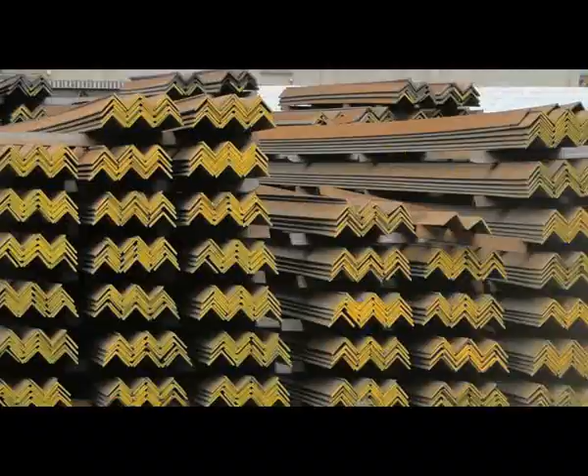Vishal Engineers and Galvanizers was established in the year 2004 by promoters having a collective experience of over 45 years in the steel industry and have a very well-known name in the market for manufacturing and trading of reinforcement steel and structures. It is with this knowledge and rich experience of steel industry that the promoters entered into the fabrication

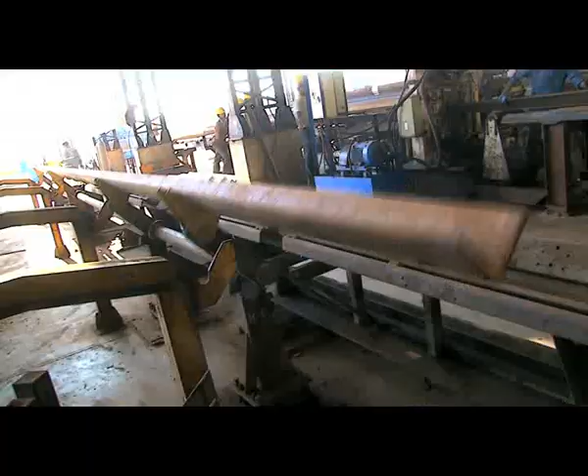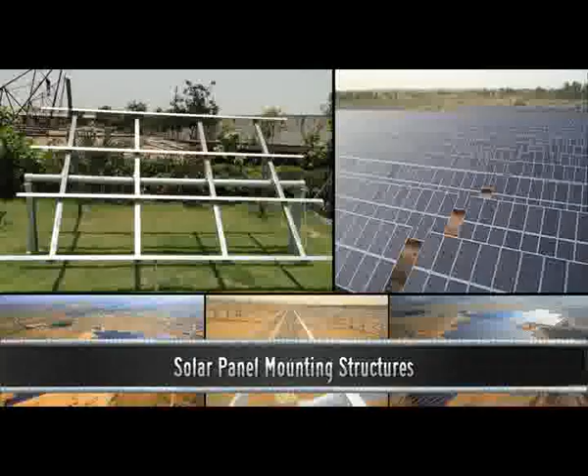and galvanizing industry. The company has established a firm footing in the industry by getting substantial orders of power transmission line towers, telecom towers, windmill towers, solar panel mounting structures, substation structures, heavy fabrication and Galva rebars, etc. from major companies and engineering groups.

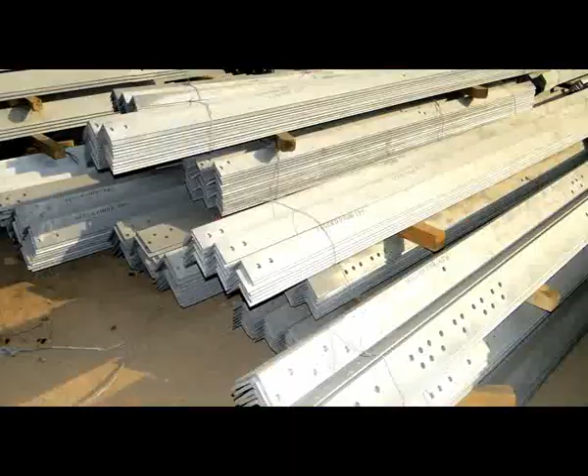These orders were awarded by reputed organizations to Vishal due to its strict quality standards and timely delivery, resulting in positive market reference. The company has been awarded the ISO 9001:2008 certification from its inception. It is also an approved vendor for PGCIL, GETCO, MSETCL, RVPNL, MPTCL, BSNL and many more reputed corporates.

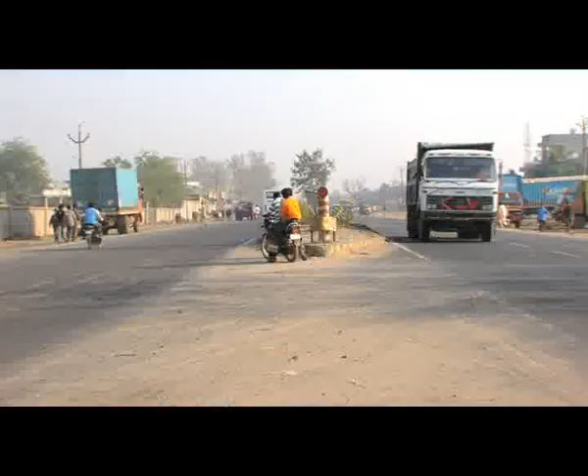In April 2011, the promoters of Vishal converted it into a private limited company, now known as Vishal Engineers and Galvanizers Private Limited. The manufacturing unit is located in a prime industrial area situated on National Highway 8A, just 20 kilometers from Ahmedabad. The location offers very easy transport connectivity. The land area of Vishal is 45,000 square yards.

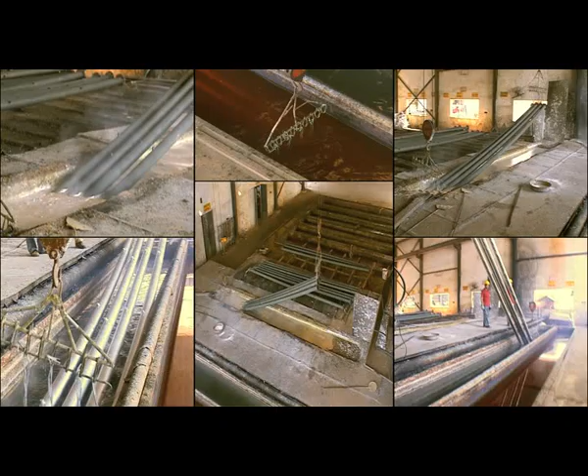The company has state-of-the-art galvanizing plants and fabrication shops, well equipped with modern technologies. There are two separate administrative blocks of 4,500 square feet each with fully equipped training room to keep the staff updated on latest developments in the sector. The company also assures and enhances the strength of its workforce of 450 by providing accommodation facilities like 12 staff quarters and 60 labor quarters.

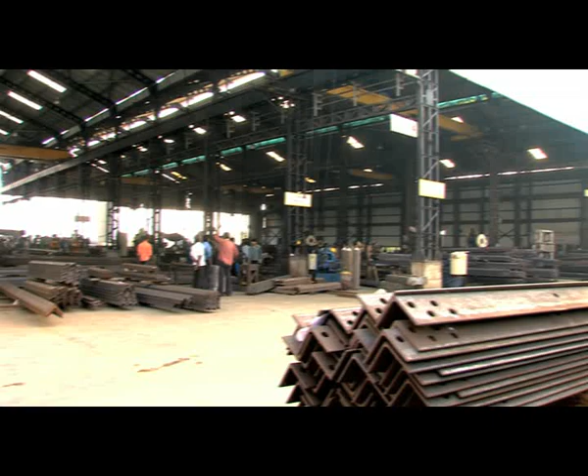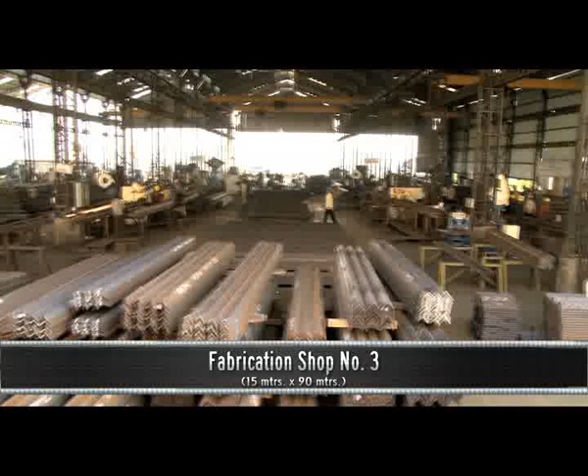Fabrication plants. The company has state-of-the-art fabrication plants, well equipped with modern fabrication technologies. The shed area of fabrication plants is Fabrication Shop 1, Fabrication Shop 2, Fabrication Shop 3, Fabrication Shop 4, each measuring 15 meters by 90 meters.

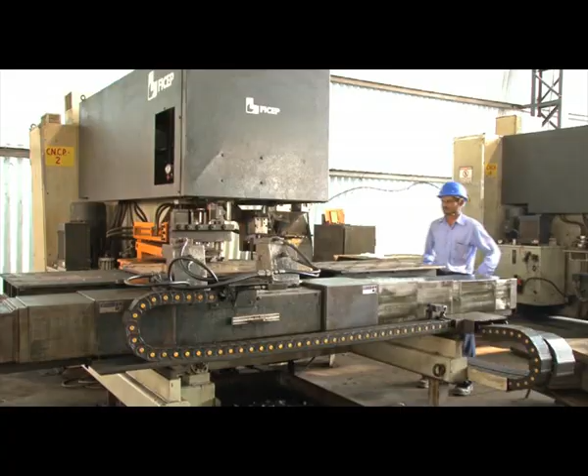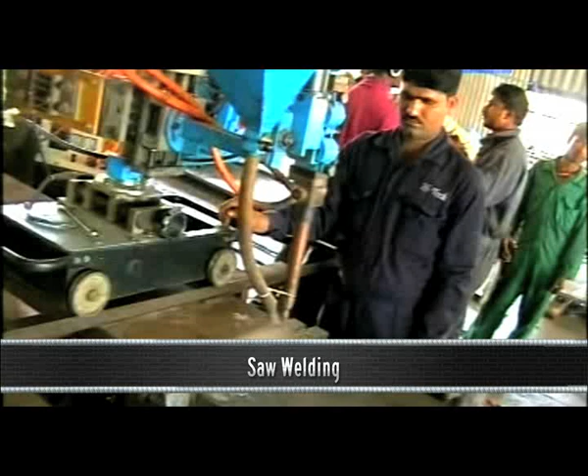The fabrication shop comprises CNC machines, imported hydraulic machines and special purpose machines to perform operations such as straightening of sections, section cutting, item numbering, CNC section punching, CNC plate punching, bandsaw cutting, heavy drilling, SAW welding, MIG welding, hot bending, heavy engineering, etc.

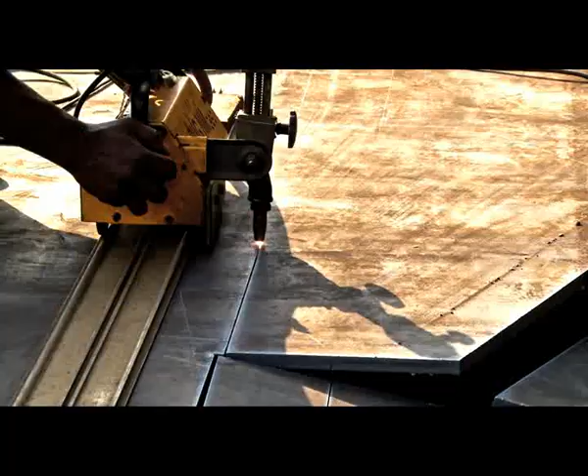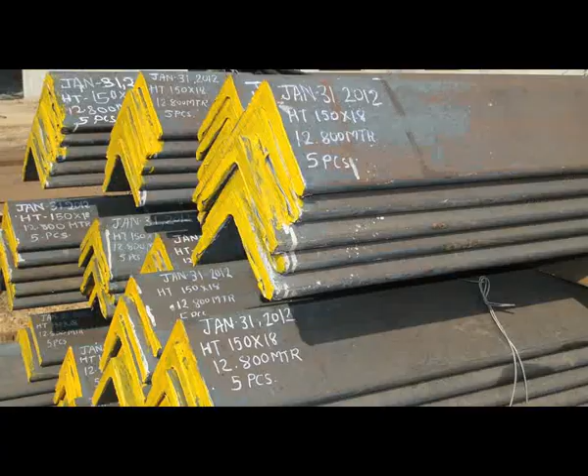The fabrication is undertaken as per IS 802 Part 2 international standards and also to the specific requirements of our clients. The company has a robust quality control program in place, right from raw material inspection, material usage traceability to final inspection. 100% black inspection is carried out for all products, thus leaving no room for doubt in quality.

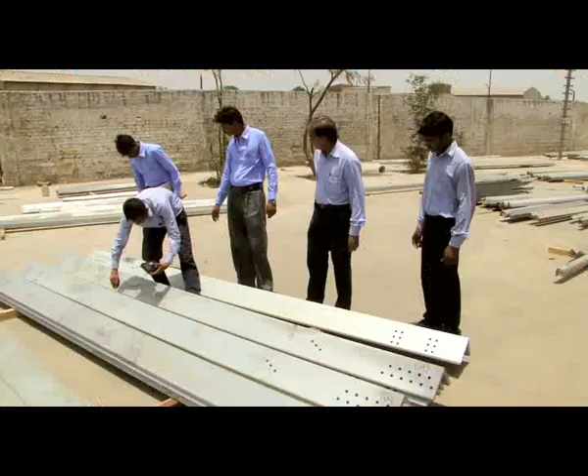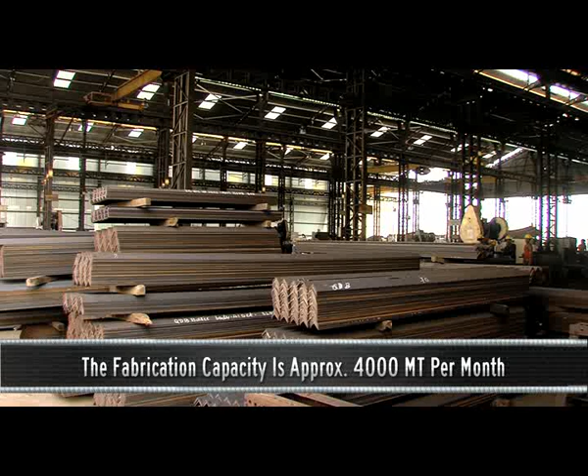The company also assures the consistency of its product by doing complete proto-assembly of structure, which is type tested at government-approved test beds like CPRI Bangalore. With the above facilities, the fabrication capacity is approximately 4,000 metric tons per month.

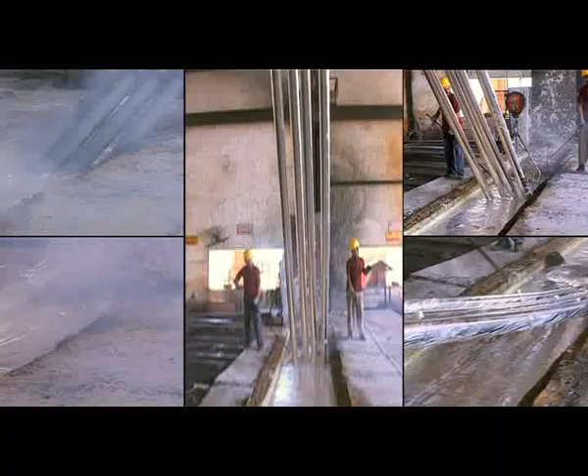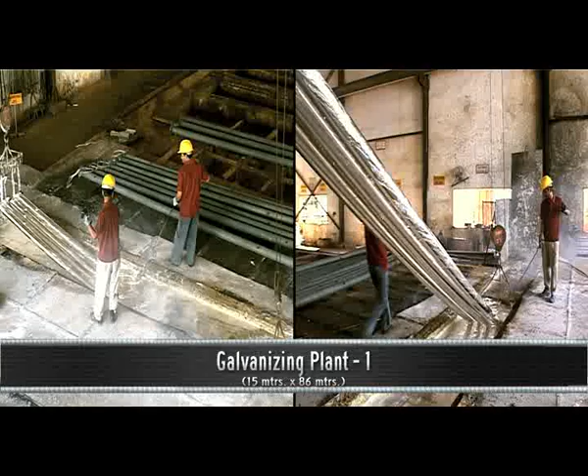Hot dip galvanizing. Hot dip galvanizing process is carried out in a fully automated temperature-controlled gas-fired galvanizing bath. The company owns two galvanizing plants. Galvanizing Plant 1, 15 meters by 86 meters. Galvanizing Plant 2, 21 meters by 66 meters.

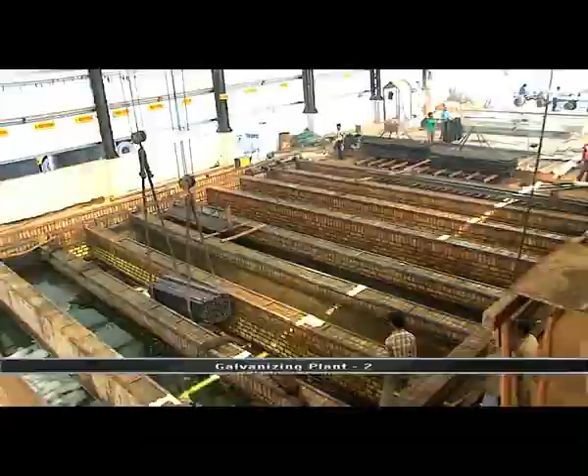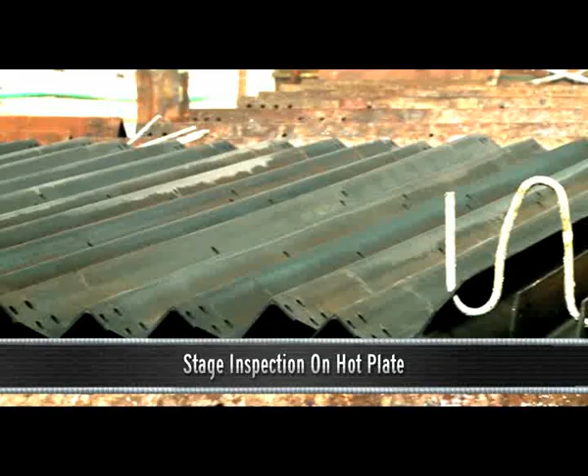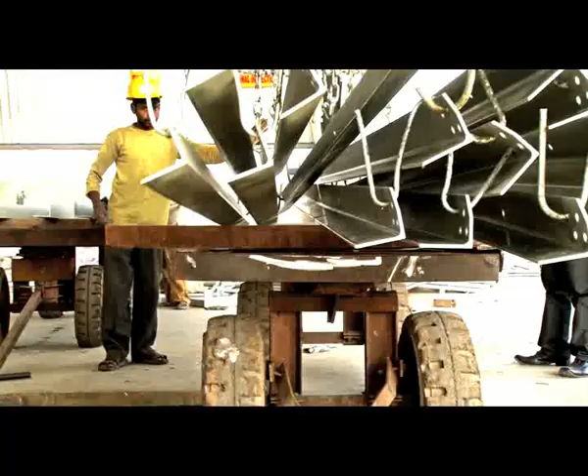The processes carried out in these plants are degreasing, acid pickling, rinsing, fluxing, stage inspection on hot plate, hot dip galvanizing, quenching, passivation, blast cleaning. The work carried out at each stage is as per the inspection matrix in accordance with the relevant standards and a well-established quality plan.

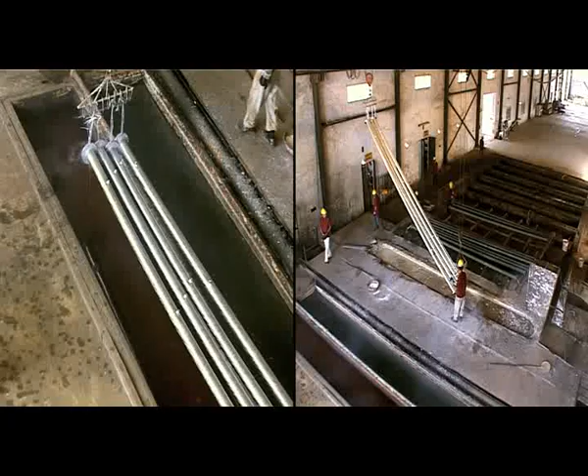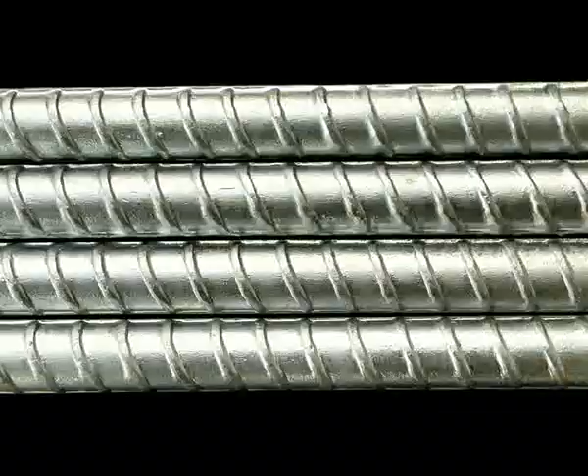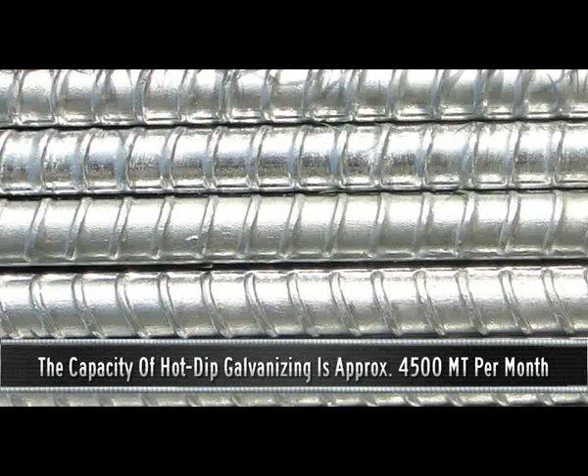The galvanizing is being carried out as per IS 4759 and 2629 on structure, as per IS 12594 on reinforcement bars, that is Galva rebars, and also as per the international standards. After galvanizing, zinc coating thickness is measured with magnetic gauge and eddy current method by dial-type meter and digital elcometers to ensure the best galvanizing results. With the above facilities, the production capacity of hot-dip galvanizing is approximately 4,500 metric tons per month.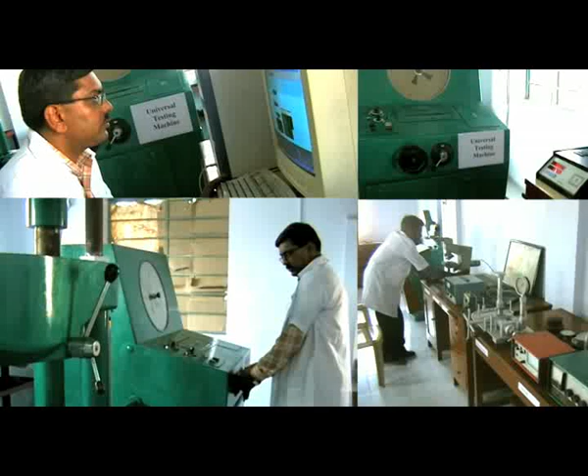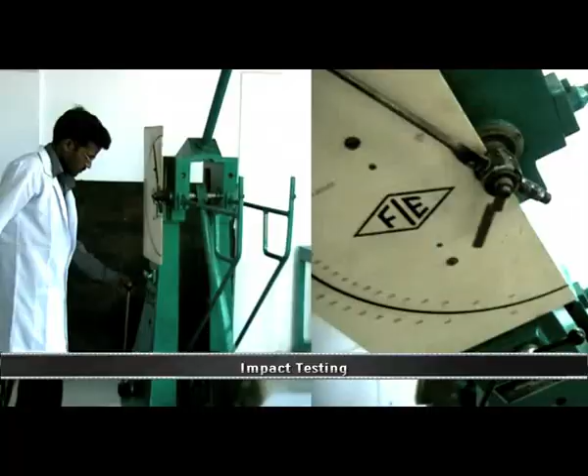Supply of high-end quality product and complete customer satisfaction is the ultimate motive of Vishal, and to ensure the same, it has complete in-house facilities of testing like spectroanalysis, tensile testing, impact testing, and galvanizing tests like hammer testing, peeling testing, mass of zinc test, etc. carried out with the help of test pieces attached to the product.

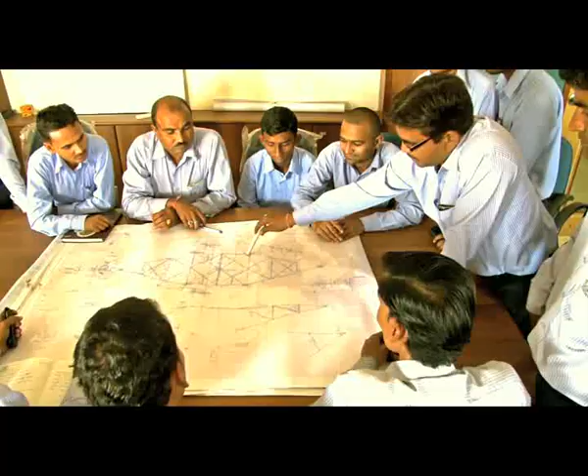The company can take pride in achieving quite a few milestones thanks to the continued improvement in production methods, automation, etc. advocated by the management. The care taken at every stage by qualified technical staff also goes a long way in establishing credibility by delivering quality and cost-effective products to the clients. Galvanized TMT rebars.

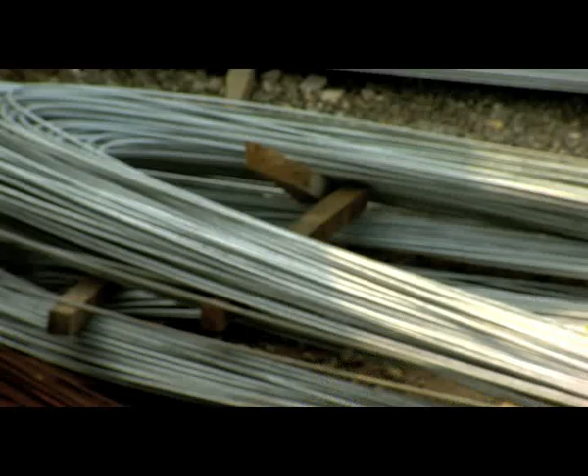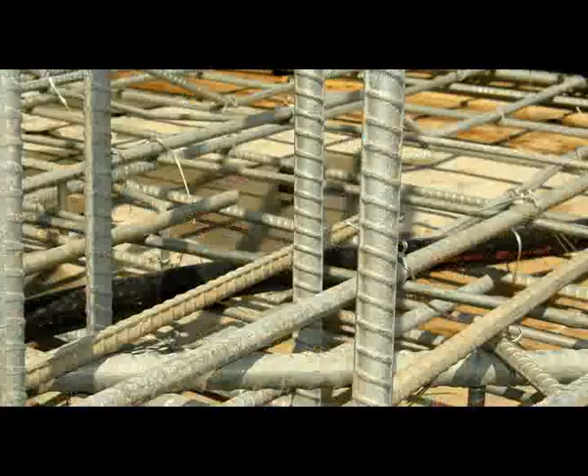Vishal Engineers and Galvanizers Private Limited is the first company in India to introduce hot-dip galvanized reinforcement steel bars, that is Galva rebars, as a readily available standard product. The company also undertakes job work of hot-dip galvanizing of MS reinforcement and TMT bars. The rebars are galvanized according to Indian Standard 12594 1988.

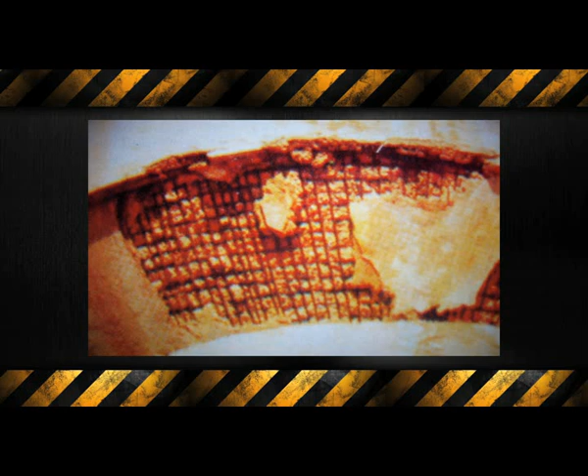It would be worthwhile to mention that the reason behind collapse of buildings is not earthquake, but expansion of steel due to corrosion by up to 3 times its original diameter. This leads to cracks in the surrounding concrete, resulting in weakening of structure.

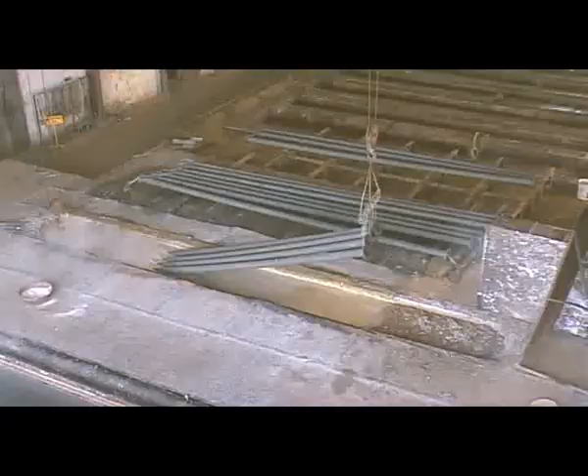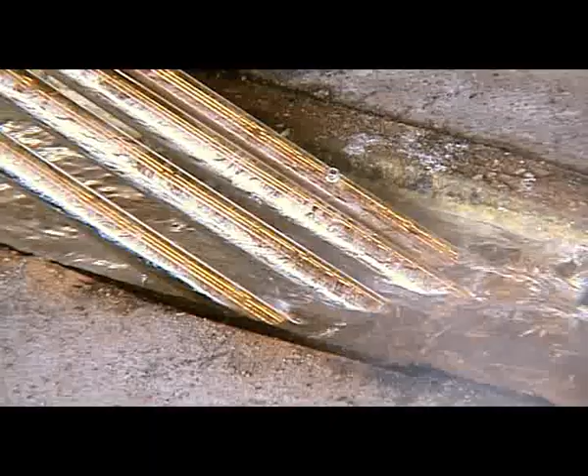The hot-dip galvanizing is a corrosion protection process which results in metallurgical bonding by completely enclosing the steel and sealing it from the corrosion impact of the atmosphere without any effect to the properties of steel. This process is secure and reliable and has emerged technically superior and cost-effective in the long run. It increases life of the TMT bars, that is Galva rebars, by more than 300%.

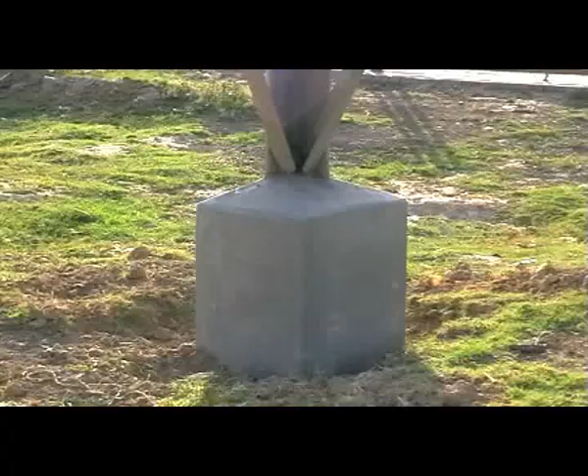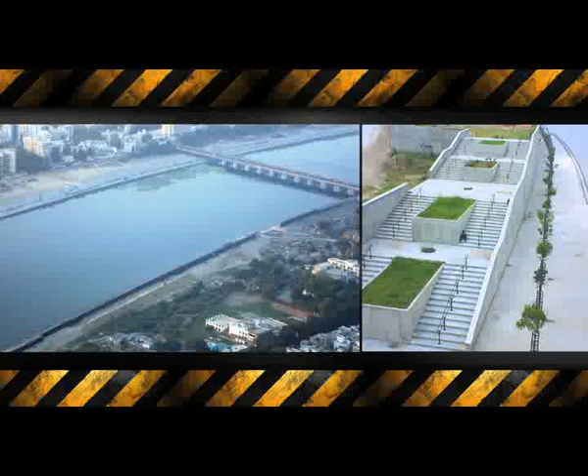We all observe common galvanized structures like windmill towers, power transmission towers, and telecom towers, etc., which were erected in the open atmosphere 30 to 60 years ago. They still have some of their original coating and are expected to be corrosion-free for years to come. Many great infrastructures in the world have used galvanized steel, like the Changi Airport of Singapore, Lotus Temple, New Delhi, Sabarmati Riverfront, Ahmedabad. Advantages of hot-dip galvanizing over epoxy and painted TMT bars.

The galvanizing coating is even and formed through a metallurgical reaction, whereas in epoxy-coated and painted surfaces the process creates a superficial layer not organically bonded to the steel. Galvanizing coating is stronger like steel and thicker than any other coatings on the corners and edges, while epoxy-coated and painted surfaces are weak as they thin out in these areas.

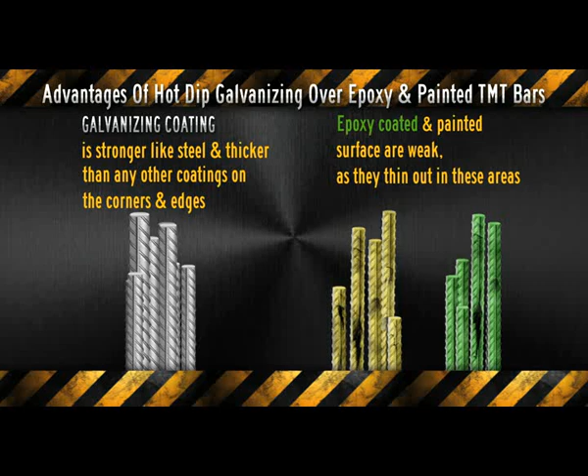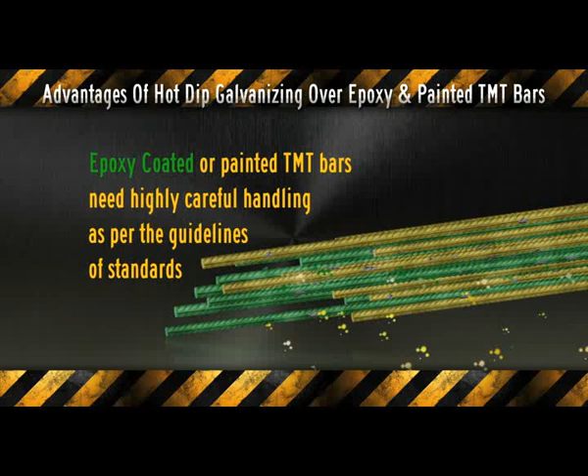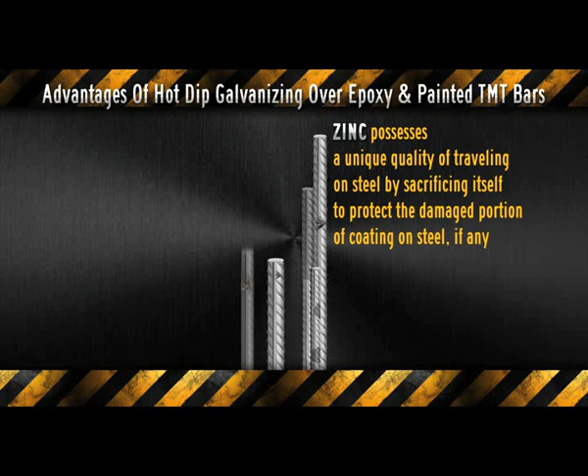Galvanized TMT bars can sustain heavy wear, impact and abrasion resistance during transportation, handling and site operation, while the epoxy-coated or painted TMT bars need highly careful handling as per the guidelines of standards. Zinc possesses a unique quality of traveling on steel by sacrificing itself to protect the damaged portion of coating on steel, if any. Zinc provides barrier and cathodic protection against corrosion, while epoxy-coated or painted TMT cannot stop corrosion once damaged.

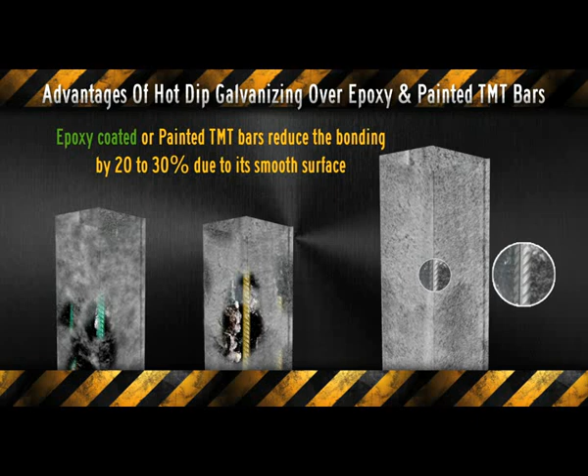Galvanized TMT bars can be stored for years in open environment, while the epoxy-coated or painted TMT bars need to be stored covered or away from sunlight as they are highly affected by UV rays of sun. The concrete bonding of galvanized TMT bars is same or better than normal black bars, while the epoxy-coated or painted TMT bars reduce the bonding by 20 to 30% due to their smooth surface, leading to use of more TMT bars than normal black or galvanized TMT bars.

Let's understand the life cycle cost by using three types of coated TMT in the same environment. At the average cost in rupees per metric ton of steel, the approximate initial cost of hot dip galvanizing is rupees 13,000, while for fusion bonded epoxy coating is rupees 12,000, and for painting it is rupees 9,000. After 5 years, the galvanizing does not require any maintenance. The epoxy coating may also not require maintenance only if the coating is not damaged before or while concreting. However, the painting needs to be done again at a cost of rupees 9,000.

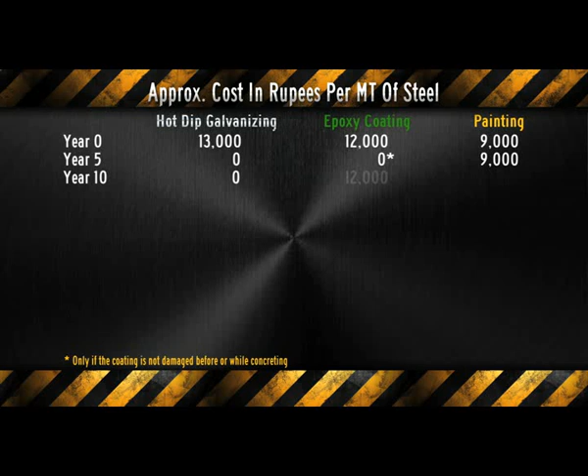After 10 years, galvanizing needs no maintenance. The epoxy coating is to be done again at a cost of rupees 12,000 and repainting at a cost of 9,000. If we calculate life cycle of 50 years, the cost of galvanizing is rupees 13,000 only, while for epoxy coating it is rupees 60,000, which is about 4.5 times, and for painting it is rupees 90,000, which is about 7 times. For simplicity, we have not calculated inflation and other hidden costs like replacing interior appearance, addition of steel, etc. The maintenance cost of fusion bonded epoxy coating and painting is much more in the long run, while galvanizing is virtually maintenance-free.

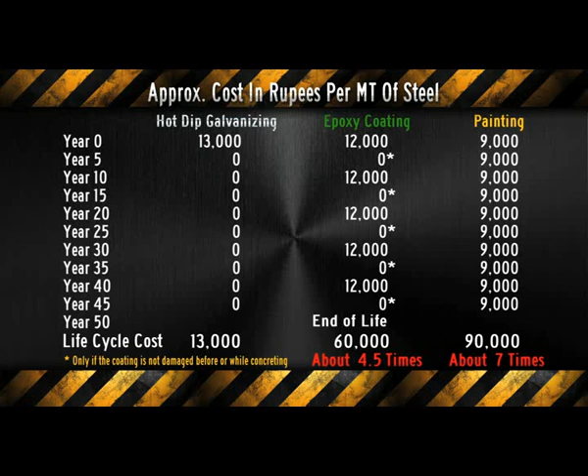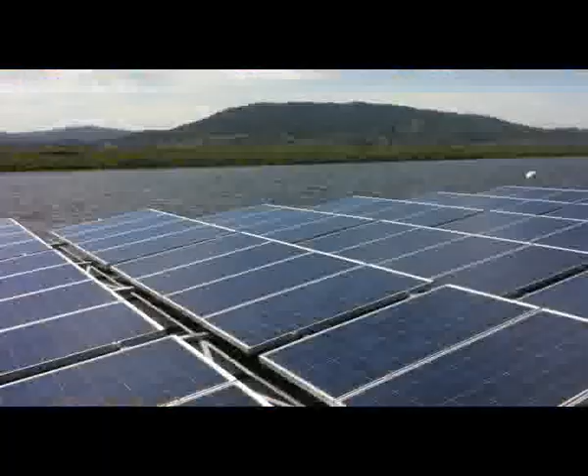Recently, the company has entered the market of solar power and manufactured solar panel mounting structure for the first 5 megawatt project of India for Reliance Industries Limited, and currently it has made a firm footing in the market of solar power with substantial orders from the sector. The products of the company are power transmission line towers, telecom towers, windmill towers, solar panel mounting structures, substation structure, electrical line material, RSJ pole, roadside guard, cable trays, gratings, galva rebars.

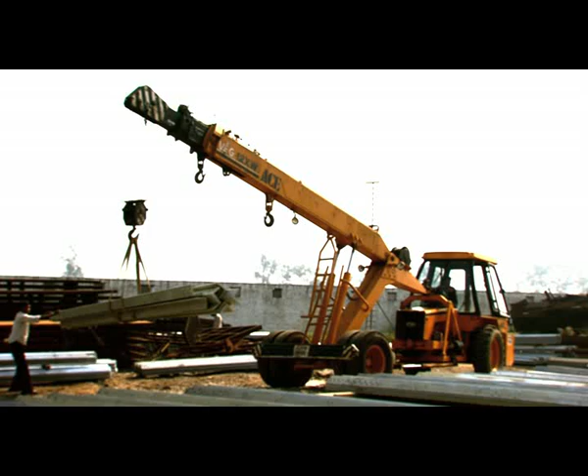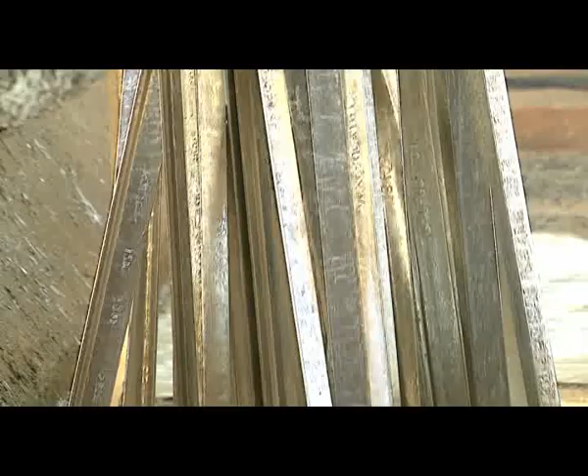To our customers, we promise to supply fabricated and hot-dip galvanized steel products that meet national and international standards at competitive price and delivery as committed. We fabricate for you the Tower of Galvanized Success. Vishal Engineers and Galvanizers Private Limited.